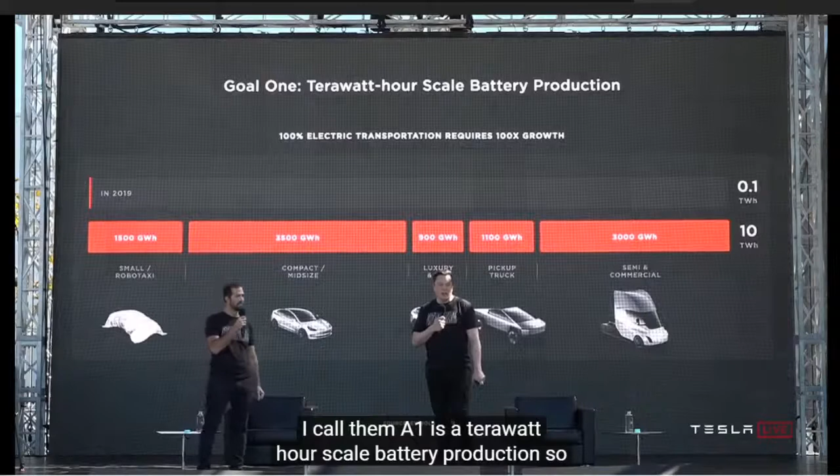So goal number one is terawatt-hour scale battery production. Tera is the new giga, and a terawatt is 1,000 times more than a gigawatt. So we used to talk in terms of gigawatts. In the future, we'll be talking in terms of terawatt hours. So this is what's needed in order to transition the world to sustainability.

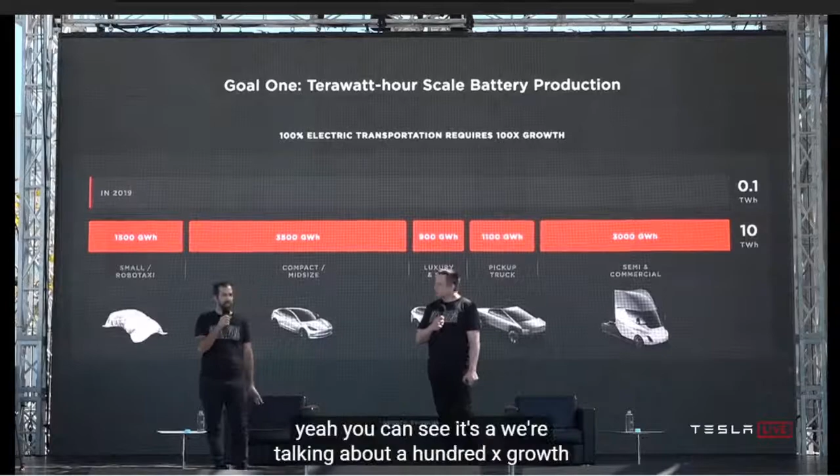Yeah, and you can see we're talking about 100x growth in batteries for electric vehicles to achieve this mission. And we are going to get there. It's just a matter of how fast, and our intention is to accelerate it.

Yeah, you basically need on the order of roughly 10 terawatt hours a year of battery production to transition the global fleet of vehicles to electric. And the average vehicle lasts 15 years, so we're talking about 150 terawatt hours, give or take, to transition all vehicles of all types to electric. Yeah, so it's a lot of batteries, basically.

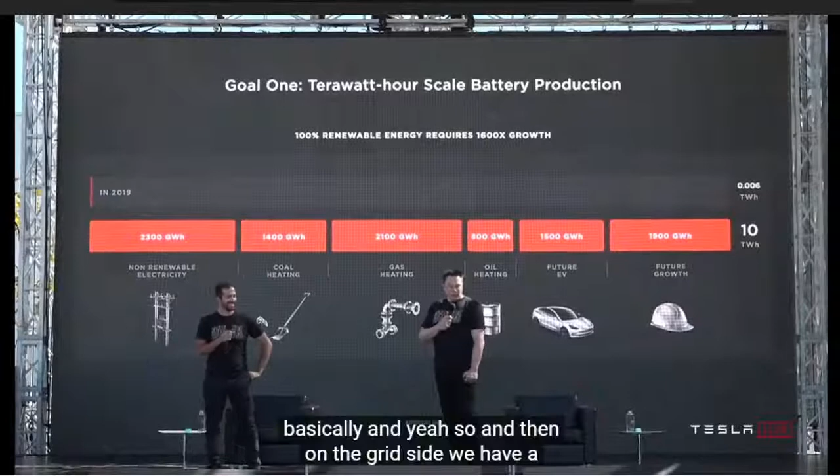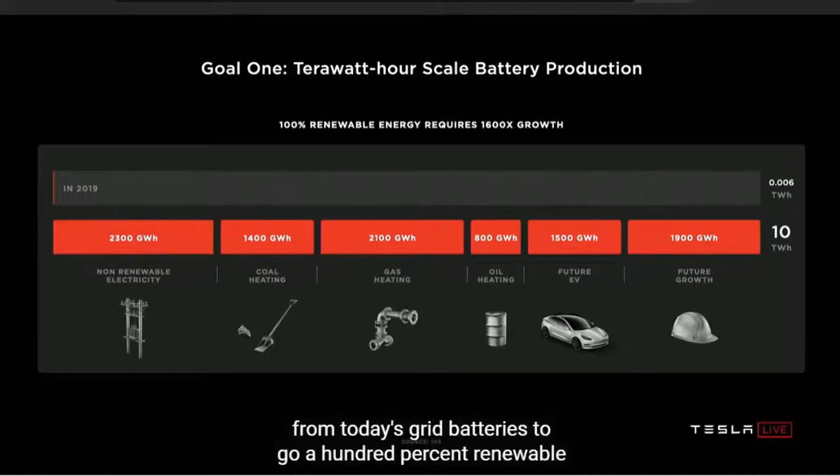And then on the grid side, we have a similar mountain to climb, 1,600 times growth from today's grid batteries to go 100% renewable on the grid and to take all of the existing heating fossil fuel uses in homes and businesses 100% electric.

Yeah, and this number, I think, might grow even more, as the world economy matures and as countries with high populations industrialize, we could see this number be even more. But let's say it's like roughly 20 to 25 terawatt hours per year, sustained for 15 to 25 years to transition the world to renewable. This is a lot. Yeah.

So today's batteries cannot scale fast enough. They're just too small. For Giga Nevada, 150 gigawatt hours per year is like what we probably expect to make out of there. But this is really pretty small in the grand scheme of things. That's only 0.15 terawatt hours.

And it costs too much. So we would need 135 fully built out Nevada gigafactories to achieve 20 terawatt hours a year. It's not a scalable enough solution. We need a dramatic rethink of the cell manufacturing system to scale as fast as we can and should.

Yeah, and I think we should view this as more than just a question of money. Money is sort of like an ethereal thing, but it's really the amount of effort. You have a certain amount of effort, in terms of people and machines, and depending on how efficient that effort is, for a given amount of effort, you want the most amount of batteries. So it's not just a question of like, well, if we had $2 trillion, tomorrow you could make this. It's not that easy. You actually need to organize a massive number of people, build a lot of machines, build the machines that make the machines. And so it's incredibly important to have that effort yield the most number of batteries.

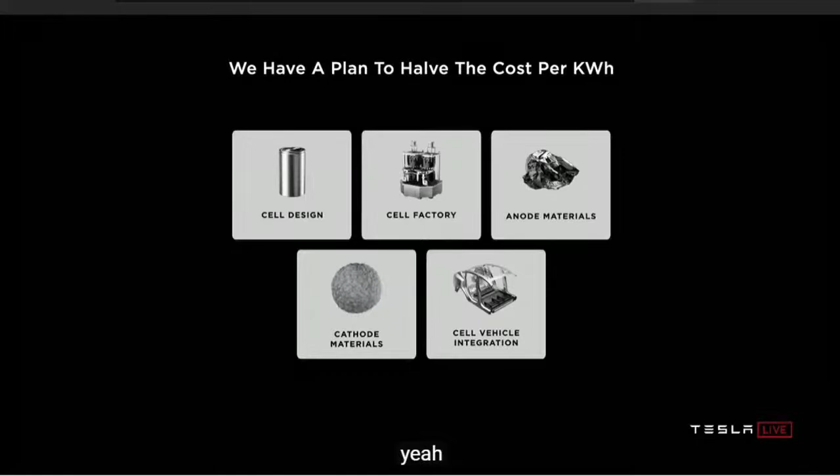And it's not a plan that rests on a single innovation, some research project that'll never see the light of day. It's a plan that has taken creative engineering and industrialization across every facet of what makes a cell into a battery pack, from raw material to the finished thing.

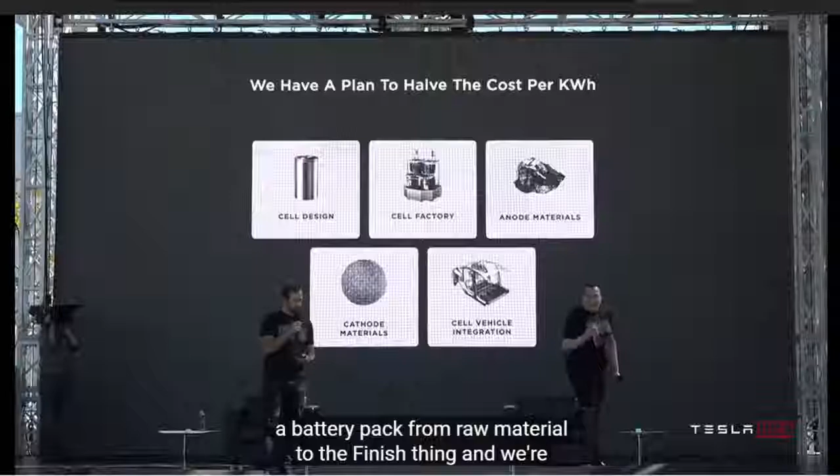We're going to go through that plan with you today, step by step, and build up how we get to these goals and how we accelerate this transition and make our vehicles and our grid batteries more affordable. We basically thought through every element of the battery, well, almost every element. There are a few more elements we won't get to today, but we will get to in the future.

So first, before we get too far into it, let's talk about what is in a battery cell. We've got the cap and the can, negative and positive terminals of the cell. When you open that cell, you've got a tab connected to those terminals, and what we call the jelly roll, which is the wound electrodes on the inside.

You can actually see what this looks like as you unwind it. This is over a meter long in a typical 2170 cell, so it's quite a long winding process. And you can see the tab still there.

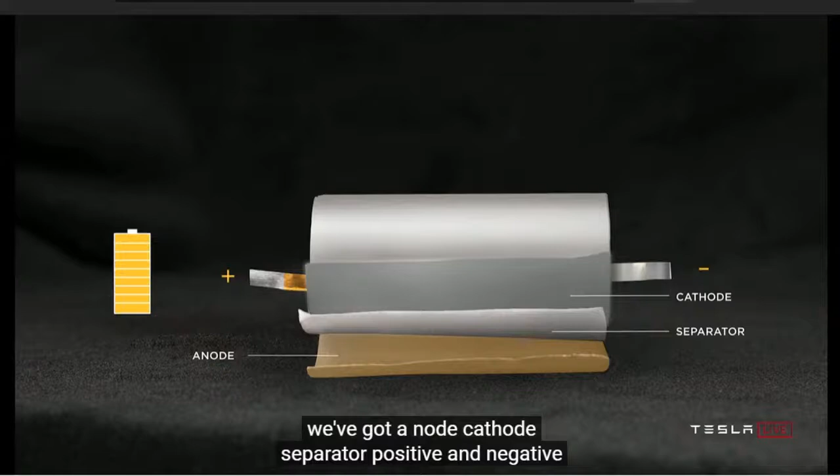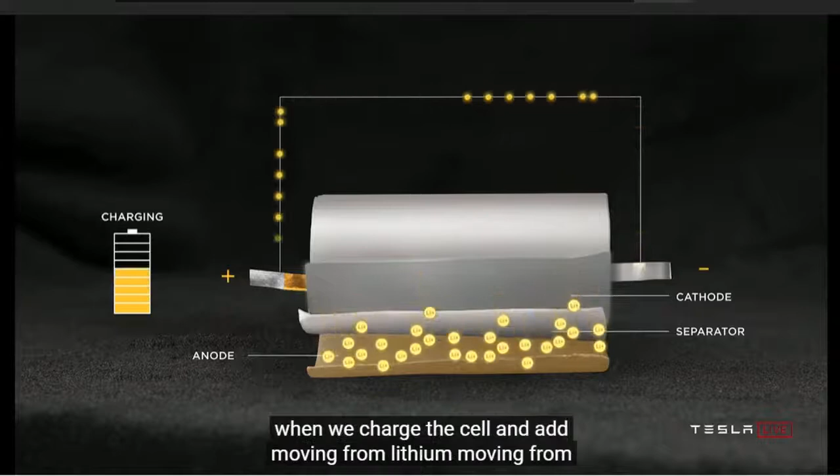To explain what's actually going on here, we've identified anode, cathode, separator, positive and negative terminal. Watch what happens as we discharge the cell: lithium moves from anode to cathode. Then the reverse — when we charge the cell, lithium moves from cathode to anode across the separator. This is the basic mechanism of all lithium-ion batteries, no matter what the form factor is.

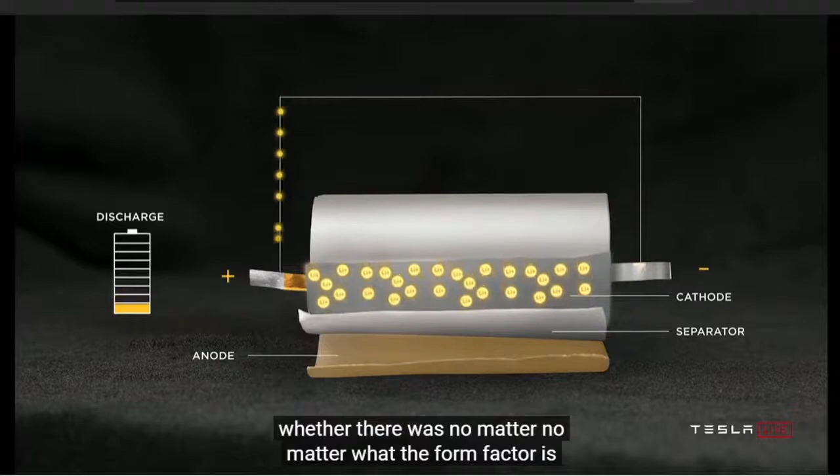When we look at what's happened to date, at least in our products, we've moved from the 18650 form factor to the 2170 form factor through great collaboration with our partners, Panasonic, new partners like LG and CATL, and probably others in the future.

A slight note on why it's called the 18650 — although not on the slide — versus the 2170: the first two digits refer to the diameter, and the second two digits refer to the length. That helps explain why these weird numbers. But nobody could explain to me why there was an extra zero, so I said, okay, well, we're deleting the zero that nobody can explain in future form factors. So technically it's the 18650, bizarrely, but going forward it's the 2170, because we just got rid of the extra zero since it's pointless.

And this was an evolutionary step, going from 18650 to 2170, bringing 50% more energy into the cell. But when we look to the ideal cell design, if we were to do it ourselves, we need to go beyond just what's in front of us and study the full spectrum of options. So as you can see, we swept the key figures of merit, how much we can reduce the cost and how much vehicle range increases as we change the outer diameter of the cell. We found a sweet spot somewhere around 46 millimeters.

But it's not just about a bigger form factor. Like anybody could make a bigger form factor. Any fool could make a bigger form factor. We're not any fool. Yeah, exactly.

Yeah, and I want to stress, this is not just a concept or a rendering. We're starting to ramp up manufacturing of these cells at our pilot 10 gigawatt hour production facility just around the corner. Yeah. So, yeah. It's a video of some of what's going on in the plant.

Now, I mean, to be clear, it will take about a year to reach the 10 gigawatt hour capacity. So this is important to appreciate. Like when you build a factory, there's a certain capacity that you design to, and then it takes some period of time to actually achieve that capacity.

So I would say it's probably about a year before we get to the 10 gigawatt hour annualized rate with the pilot plant. And this is just a pilot plant. The actual production plants will be more on the order of maybe 200 gigawatt hours, maybe more over time. And thank you.

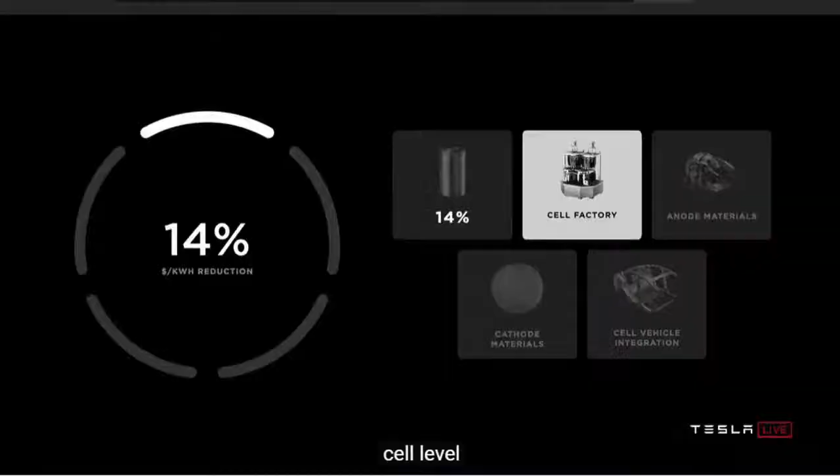But let's stack up everything we just saw at the cell level. So just the cell form factor change enables a 14% dollar per kilowatt hour reduction, just that cell form factor change. And now that you've been teased on this factory, we're going to go on and walk step by step through that factory and discuss a series of innovations there.

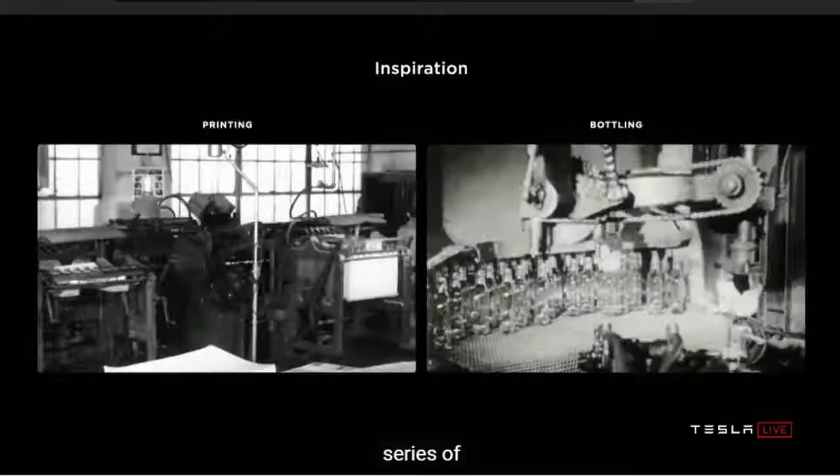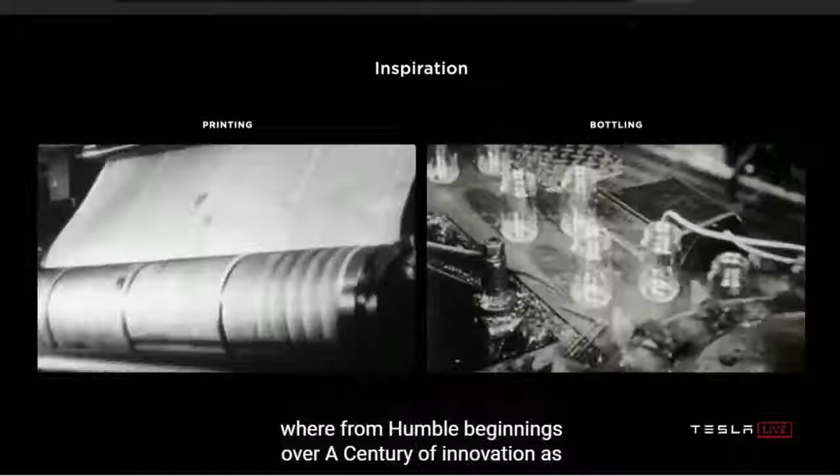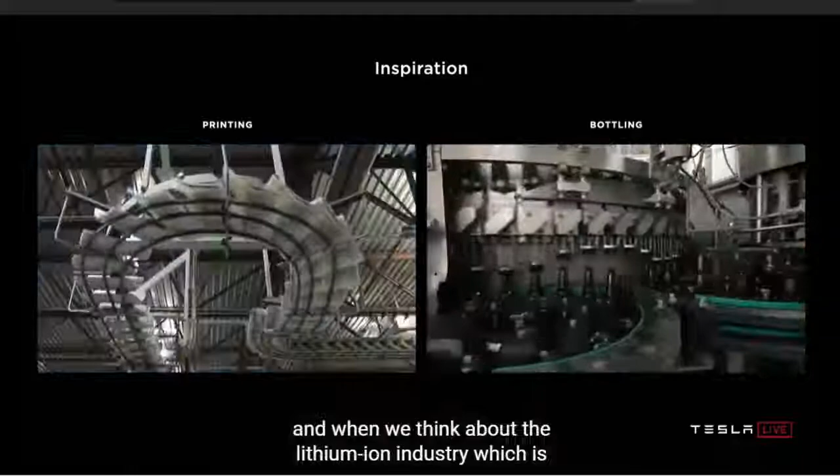When thinking about the ideal cell factory, we have inspirations behind us in the printing and bottling industry, where from humble beginnings, over a century of innovation has enabled mass scale, continuous motion, unbelievably low manufacturing cost. And when we think about the lithium-ion industry, which is really only in its third decade of high-volume production, it has so far to go to achieve similar scale and simplicity.

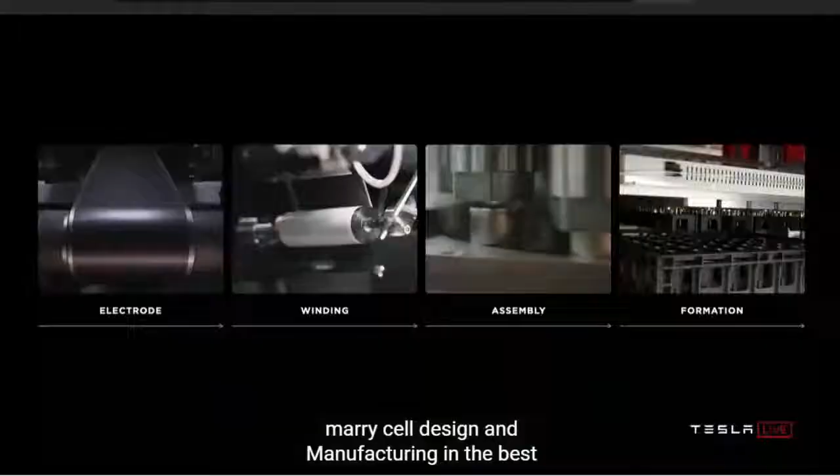And that was the inspiration that we set out to the team as we thought about how to marry cell design and manufacturing in the best possible factory. And let's talk a little bit about what's in a cell factory. First, there's an electrode process where the active materials are coated into films onto foils. Then those coated foils are wound in the winding process we just talked about, where if you do have tabs, you have to start and stop a lot.

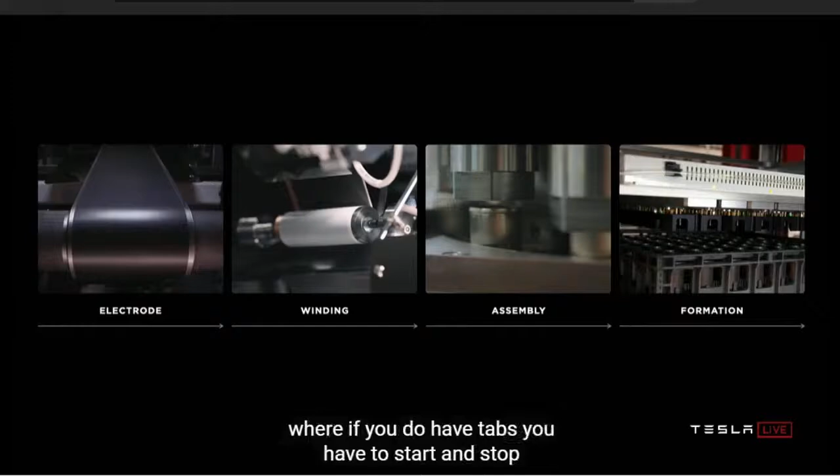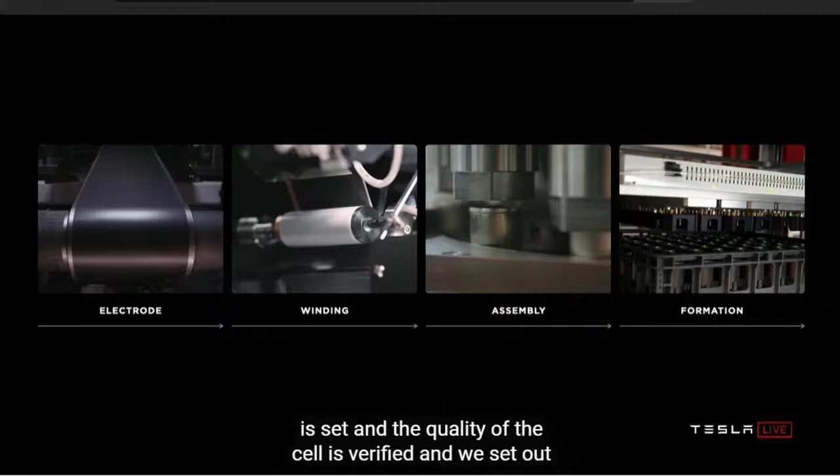Then the jelly roll is assembled into the can, sealed, filled with electrolyte, and then sent to formation, where the cell is charged for the first time, and where the electrochemistry is set and the quality of the cell is verified. And we set out at every step of this process to try to take that inspiration we just showed and think about how we make those processes fundamentally better and more scalable.

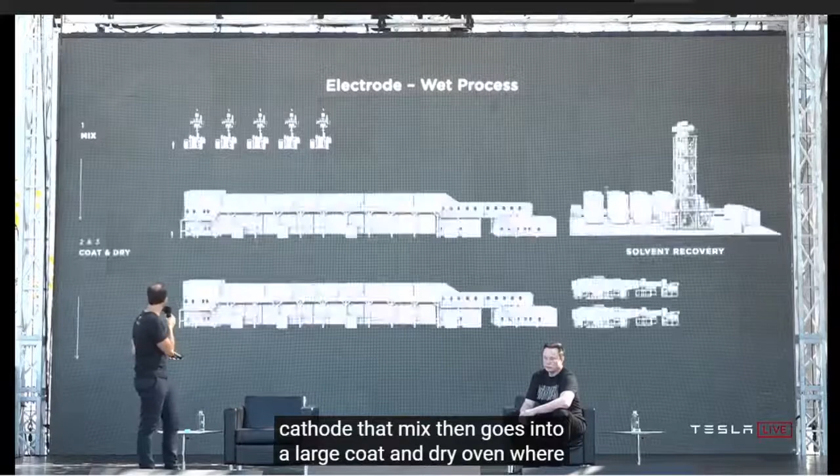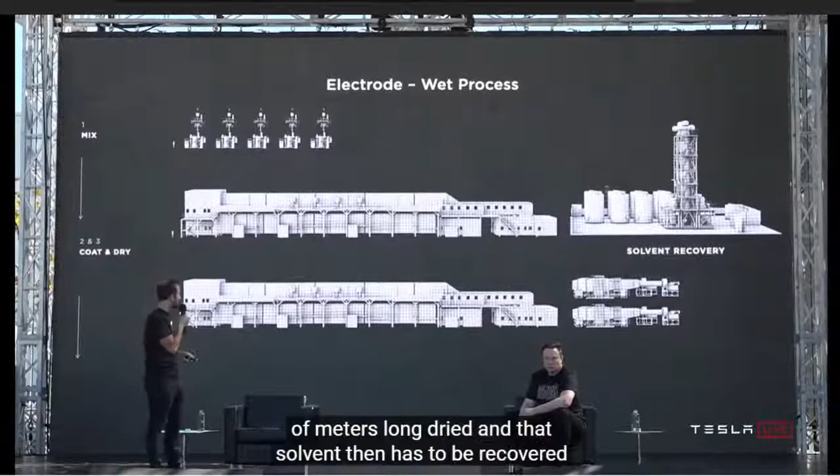And one of the most important processes is where it all begins, the wet process of the electrode coating. And just to give you all a sense of scale, I'm going to walk through what's in that wet process. You've got mixing, where the powders are mixed with either a water or a solvent for the cathode. That mix then goes into a large coat and dry oven where the slurry is coated onto the foil, huge ovens, tens of meters long, dried, and that solvent then has to be recovered. You can see the solvent recovery system.

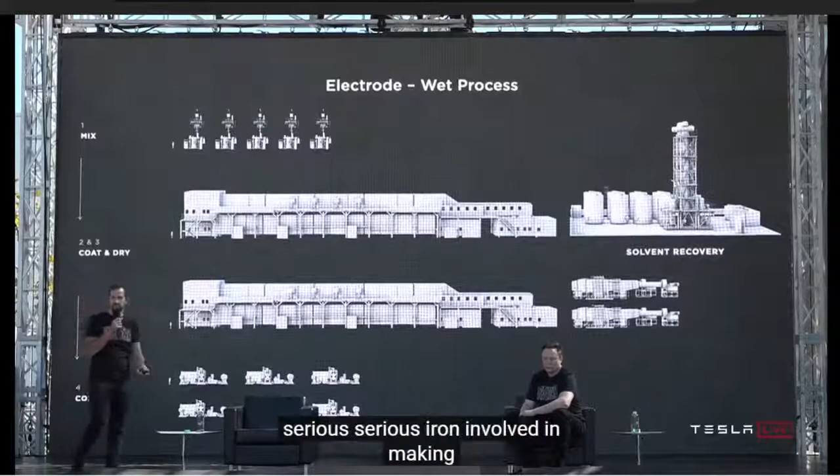And then finally, the coated foil is compressed to the final density. And when you're looking at this, you're like, wow, that's a lot of equipment for one step, especially when you consider that little speck next to the coating oven is a person. This is serious iron involved in making batteries.

Wouldn't it be great if we could skip that solvent step, which is one of those dig a ditch and then fill it kind of things where you put the solvent in and then take it out and recycle it, and just go straight to dry mix to coat? And that's what the dry process really is about. And in the most basic form, you can see it here on a bench top. Literally, powder into film.

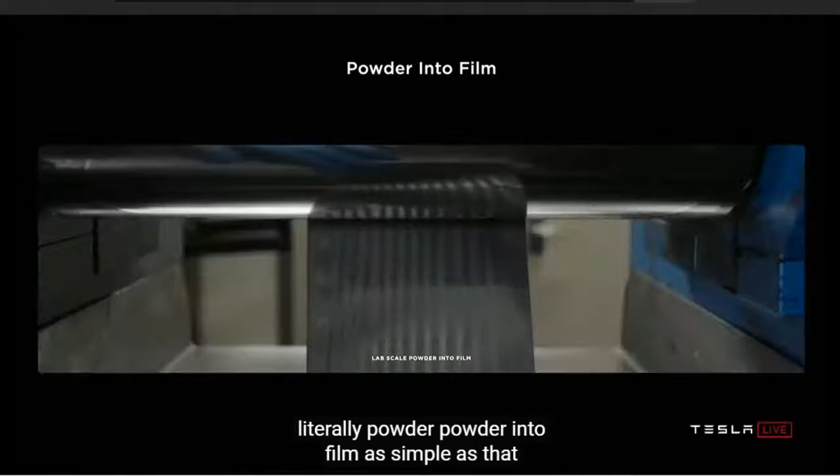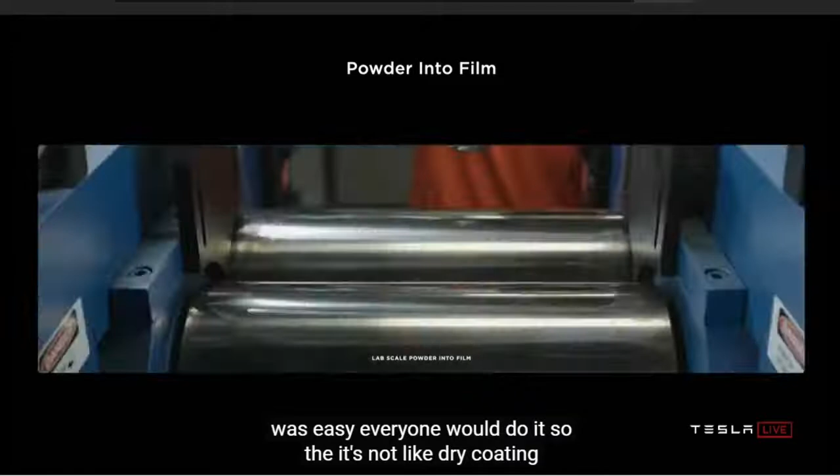As simple as that. I mean, it's hard, actually, just to be clear. So, if this was easy, everyone would do it. So it's not like dry coating electrode is actually easy. It's actually very hard to do what appears to be a simple thing.

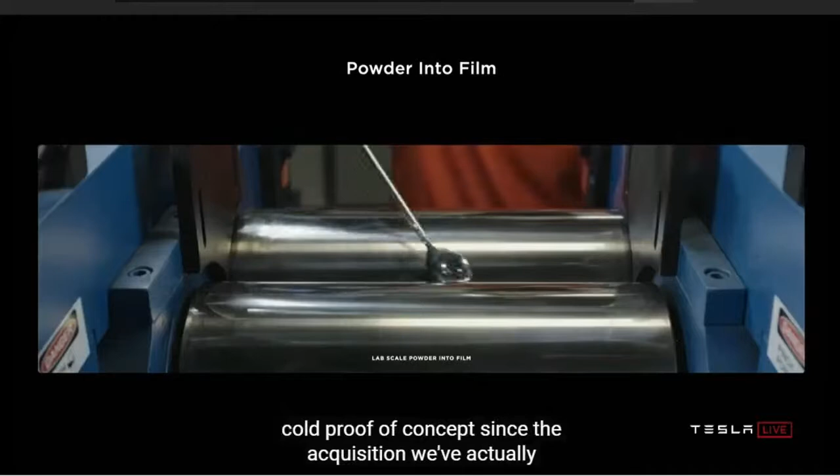And it's worth noting, we did acquire Maxwell a little over a year ago, I guess. And it's certainly a good company and everything, but the dry coating they had was sort of what I would call proof of concept. Since the acquisition, we've actually revved the machine that does the dry coating 4 times.

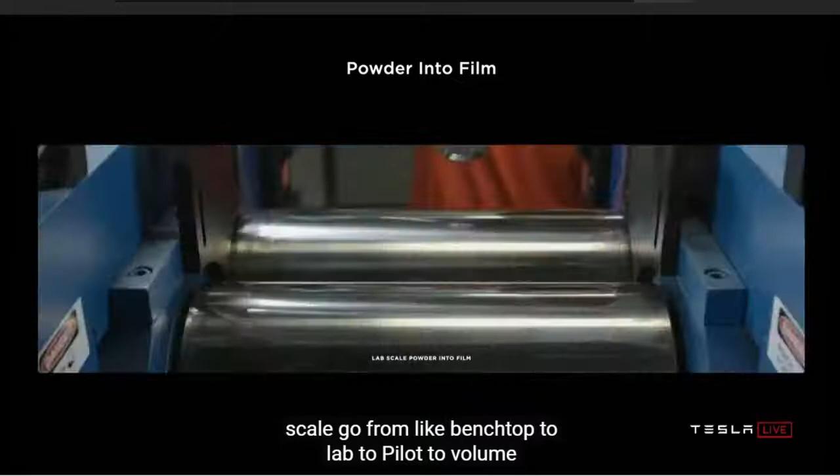So we're in revision 4 post acquisition of the machine, and there's still a lot of work to do. So I would not say this is completely in the bag. It's still a lot of work to do, and as you go from benchtop to lab to pilot to volume production, there are actually major issues that you encounter at every level. It's not like you make something work on your bench and bingo, now you can make a bazillion of it. Absolutely. It's insanely difficult to scale up.

But if you do scale it up, what you saw before becomes this. Yeah. So you can see the motivation. A 10 times reduction in footprint, a 10 times reduction in energy, and a massive reduction in investment. But as Elon was saying, simple is hard. Yeah.

Yeah, to be clear, I would like to not say that right now it's just totally working. It's close to working, even now at the pilot plant level. Well, it's fair to say it does work, but with not a high yield. Yeah, so we're still ironing out the kinks, but we've made tens of thousands of cells, thousands of kilometers of electrode. We are on the 4th generation of the equipment, so we've learned a lot along the way.

Yeah. It is super demanding because every atom has its place if you want to deliver the energy density and the cycle life and the supercharging. But we're confident that we will get there, but it will be a lot of work along the way. There's a clear path to success, but a ton of work between here and there. Yep. But this is a really profound improvement. Again, for people that know battery manufacturing, this is gigantic.

We'll probably be on machine revision 6 or 7 by the time we do large-scale production. The rate at which the machines are being improved is extremely rapid. Literally every 3 or 4 months is a new rev. Yeah, and beyond the electrode, we continue to innovate on every other process step. So let's talk a little bit about assembly, which is next.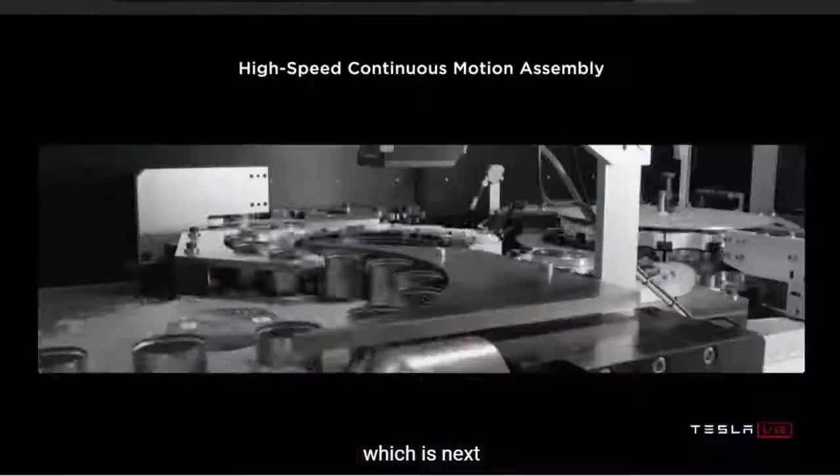The key to a high-performing assembly line is accomplishing processes while in motion, continuous motion, and thinking of the line as a highway, max velocity down the highway, no start and stop, no city driving. Exactly, no stoplights and traffic lights or anything. You want the highway. I want the highway.

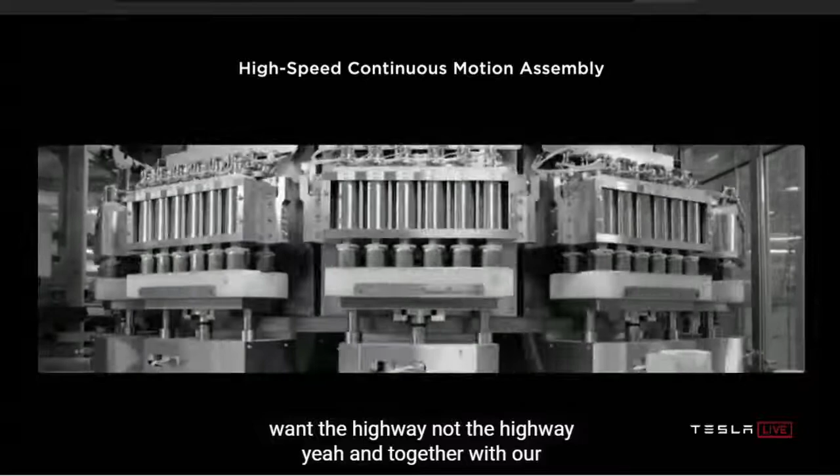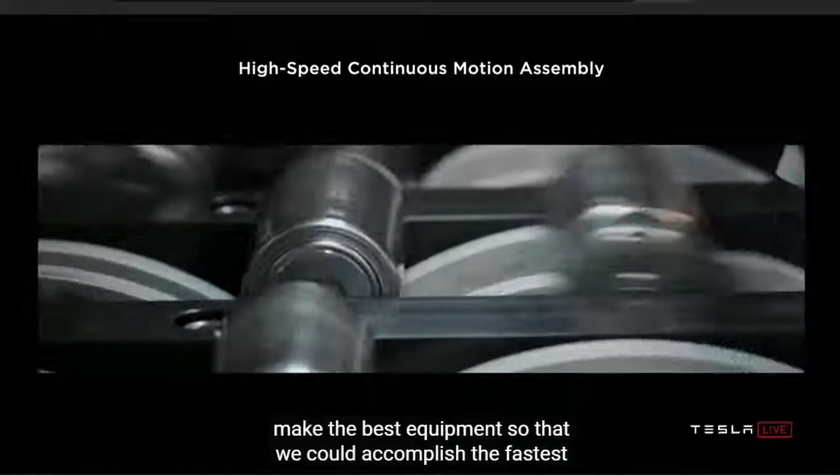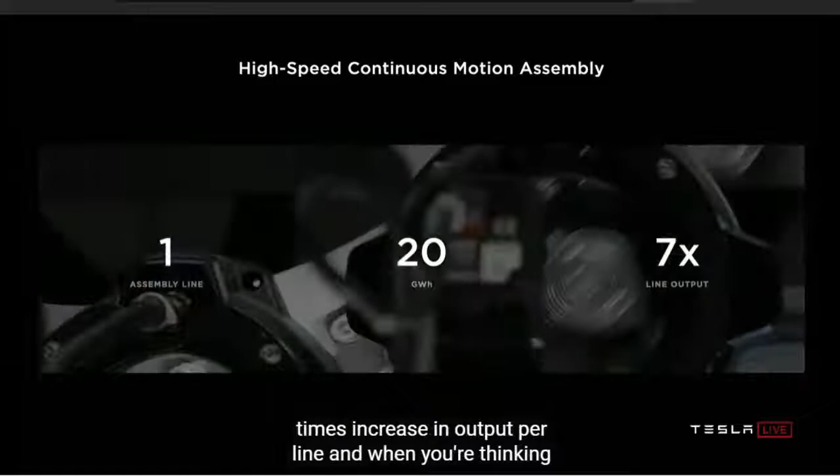Yeah. And together with our internal design team that designs this equipment, we coupled thinking about how to make the best cell with thinking about how to make the best equipment so that we could accomplish the fastest parts per minute rates on all of these tools. And through all of that development, we were able to implement assembly lines: one line, 20 gigawatt hours, 7 times increase in output per line. And when you're thinking about scalability and pure effort, having one line be 7x the capability is just effort multiplying. Yeah.

You can sort of think about the fundamental physics of a factory. I think it's actually quite a lot like the rocket equation, where you've got your exhaust velocity and then the log of the start to end masses. So it's basically saying, how fast are things going and what percentage of the factory volume is doing useful work. And conveyance does not count as useful work. So only the value-added steps.

If you break the factory down into cubic meter sections, or smaller, like 1 liter sections, and say, is a majority of this volume doing useful work? You would be astounded at how bad most factories are. They're maybe 2 or 3%, including our factory in Fremont. So I think it is possible to get to at least 10 times that volumetric efficiency. So more like 30%, maybe more, and be 10x better, which means the factory can be 10 times smaller. And then the other thing is how fast things are going through the factory. It's like speed and density.

The faster you go, a factory moving at twice the speed of another factory is equivalent to two factories. The company that will be successful is the one that with one factory can accomplish what other companies take 2, 3, or 4 factories to do.

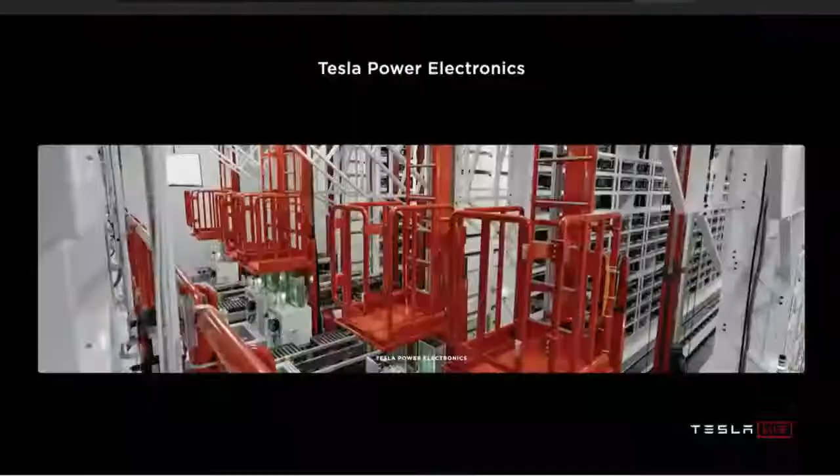Okay, now let's talk about formation. In a typical cell factory, formation represents 25% of the investment. What is formation? It's charging and discharging cells and verifying the quality of the cell. Turns out we've charged and discharged billions and billions of cells in our vehicles, so we know a thing or two about that. The typical formation setup is you charge and discharge each cell individually.

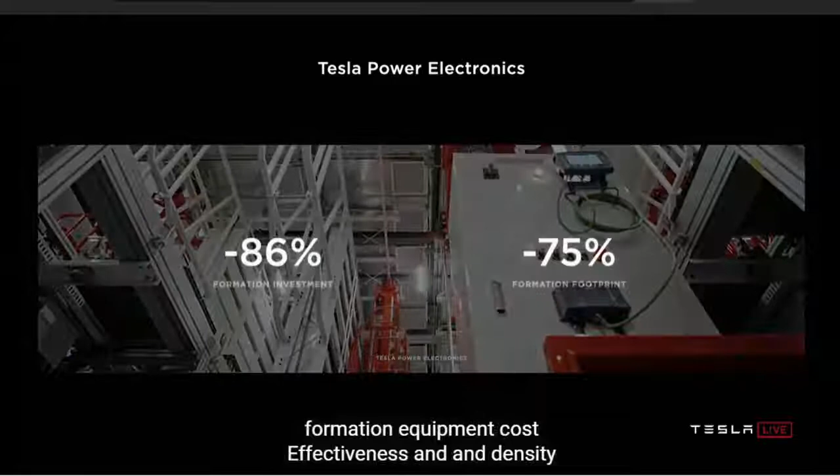In our car, we charge thousands of cells at once. And we took our principle and our power electronics, leveraging Powerwall, vehicle battery management systems, and others, to dramatically improve the formation equipment cost effectiveness and density. This results in an 86% reduction in formation investment, and a 75% reduction in footprint.

So essentially what this translates to, based on what we know today, is about a 75% reduction in the investment per kilowatt hour or gigawatt hour. It's basically 4 times better than the current state of the art, to the best of our knowledge. And I think there's probably room to improve even beyond that. Definitely, yeah.

We're able to, from a volume standpoint, get in a smaller form factor than Giga Nevada many times the cell output. So you can see we can get a terawatt hour in less space than it took to make a gigawatt hour, 150 gigawatt hours. So this is pretty profound. I would not have thought this was possible several years ago, that we could get to terawatt hour scale in less space than what we currently envision for doing 150 gigawatt hours.

Yes, simpler accelerates terawatt hour scale, and that's what we need to do to accelerate our mission. And as Elon said, we're going to try to even improve on this as we push towards our goals.

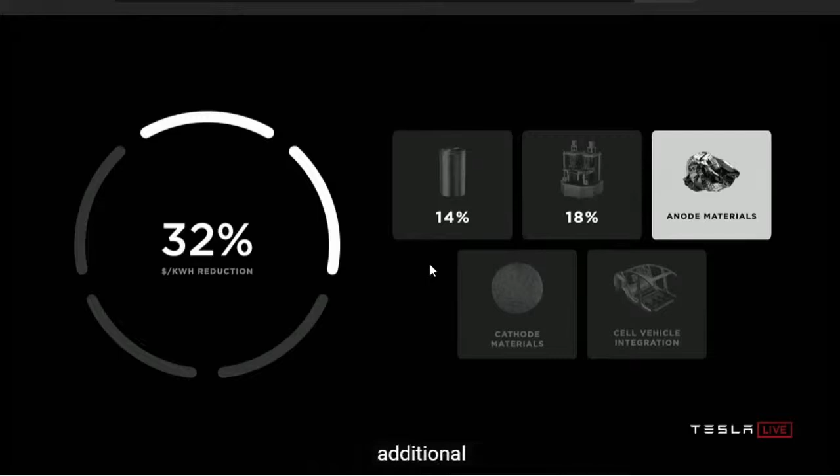Not only is all of that manufacturing innovation fantastic for enabling scale, it's also an additional 18% reduction in dollar per kilowatt hour at the battery pack level. But wait, there's more. But wait, there's more.

So we have a manufacturing system. We've got a cell design. What are the active materials we're going to put in that cell design? Let's talk about the anode first. Let's talk about silicon. Why is silicon awesome?

It's awesome because it's the most abundant element in the Earth's crust after oxygen, which means it's everywhere. It's sand. Sand is silicon dioxide. And it happens to store 9 times more lithium than graphite, which is the typical anode material in lithium-ion batteries today. So why isn't everybody using it? The main reason is because the challenge with silicon is that it expands 4x when fully charged with lithium.

All of that expansion stress on the particles causes cracking, they start electrically isolating, you lose capacity, and the energy retention of the battery starts to fade. It also gums up with a passivation layer that has to keep reforming as the particles expand. Basically, with silicon, the cookie crumbles and gets gooey.

Current approaches to solve this, which exist today, are the silicon in the cars you're all in right now. They involve highly engineered, expensive materials in the scheme of things. They're still great and enable some of the benefits of silicon, but they don't enable all of it, and they're not scalable enough. You can see some things you may have heard of: SiO, silicon with carbon, or silicon nanowires. That's kind of the space right now.

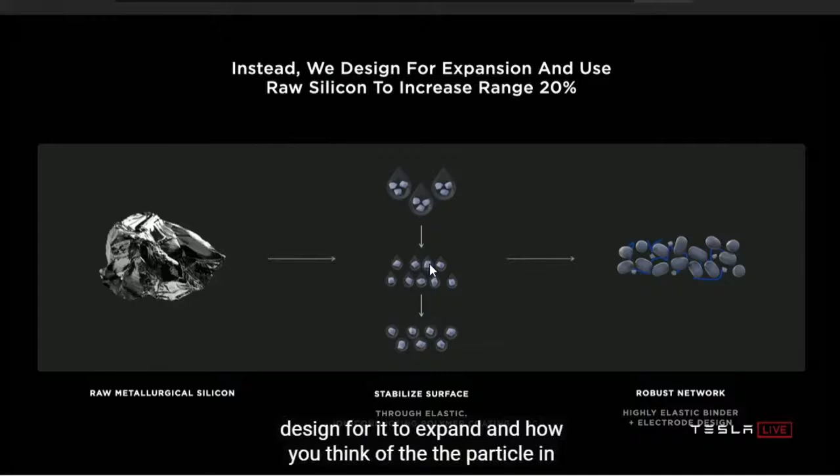What we're proposing is a step change in capability and a step change in cost. That really means going to the raw metallurgical silicon itself. Don't engineer the base metal. Just start with that and design for it to expand and how you think of the particle in the electrode design and how you coat it.

Basically, $1 per kilowatt hour. If you use simple silicon, it's dramatically less than even the silicon currently used in batteries made today, and you can use a lot more of it. The anode would cost, with this silicon, $1.20 a kilowatt hour.

So how does it work? Start with raw metallurgical silicon, stabilize the surface with an elastic ion-conducting polymer coating applied through a very scalable approach—no chemical vapor deposition, no highly engineered high capex solutions—and then integrate it into the electrode through a robust network formed out of a highly elastic binder.

In the end, by leveraging this silicon to its potential, we can increase the range of our vehicles by an additional 20%, just from this improvement. It gets cheaper and longer range. When we take that anode cost reduction, we're looking at another 5% dollar-per-kilowatt-hour reduction at the battery pack level. And there's more.

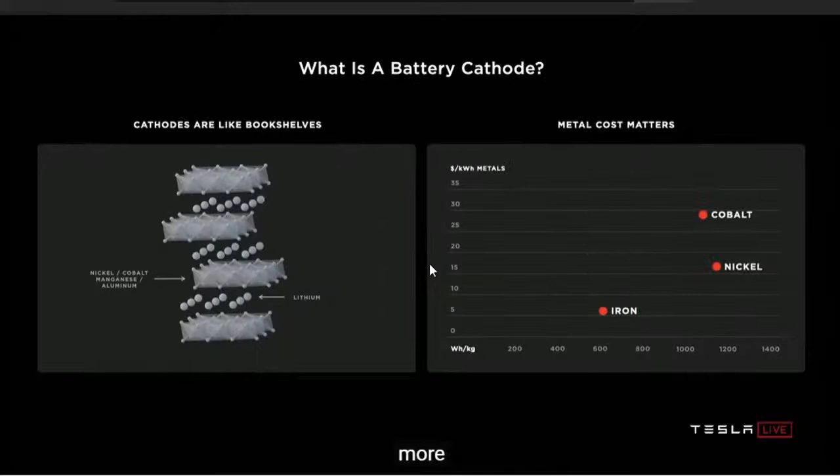Let's talk about cathodes. What is a battery cathode? Cathodes are like bookshelves, where the metal—the nickel, the cobalt, the manganese, or aluminum—is like the shelf, and the lithium is the book. What really sets apart these different metals is how many books of lithium they can fit on the shelves and how sturdy the shelves are.

It's tough to figure out exactly the right analogy to explain cathode and anode, but a bookshelf is probably a pretty good one, in the sense that you need a stable structure to contain the ions. You want a structure that doesn't crumble or get gooey—that holds its shape in both the cathode and the anode. As you're moving these ions back and forth, it needs to retain its structure. If it doesn't, you lose cycle life and your battery capacity drops very quickly.

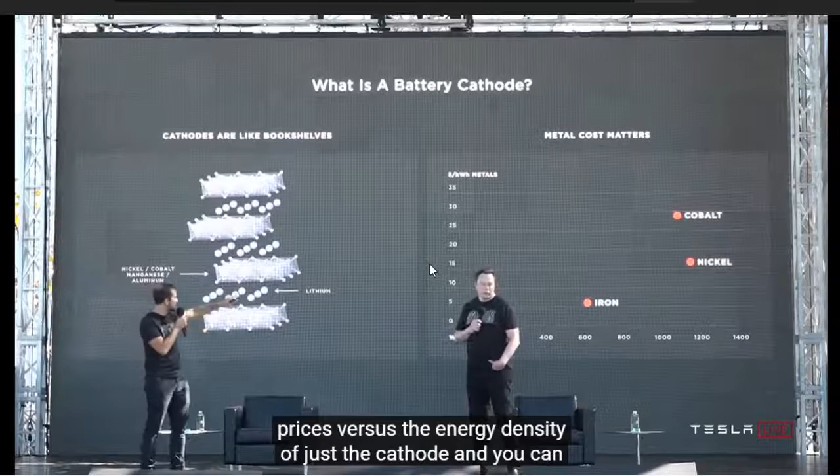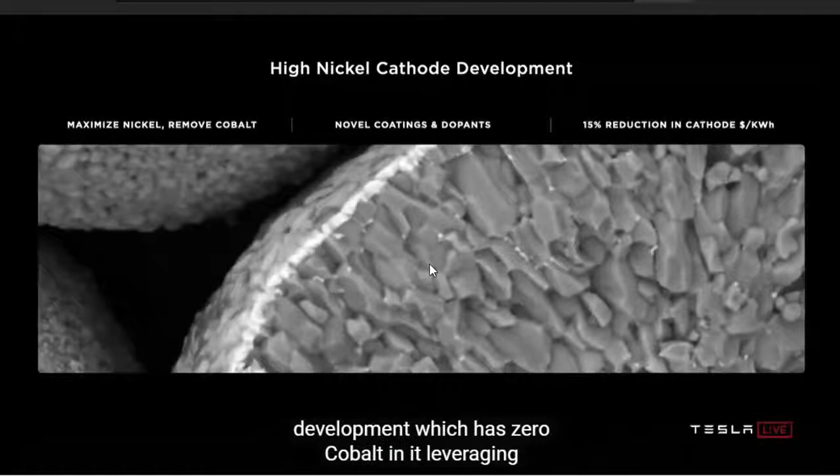One of the reasons cobalt is even used at all is because it's a very stable bookshelf. The challenge with going to pure nickel is stabilizing that bookshelf with only nickel. That's what we've been working on with our high-nickel cathode development, which has zero cobalt in it. Leveraging novel coatings and dopants, we can get a 15% reduction in cathode dollar per kilowatt hour. It's a big deal.

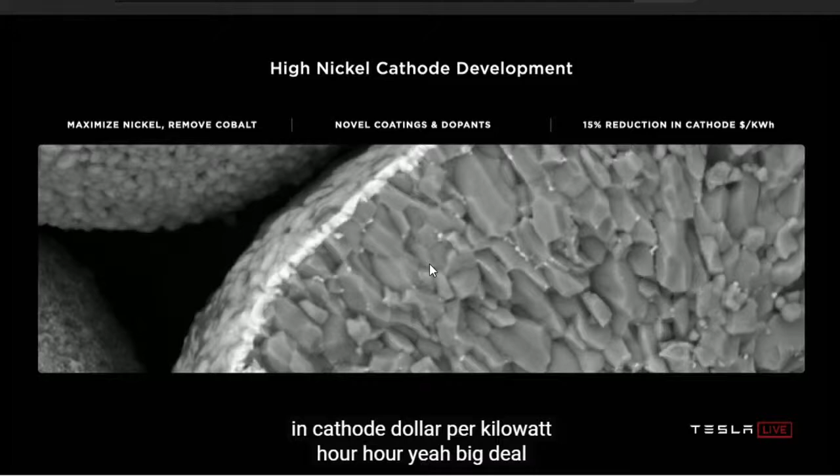But it's not just about nickel. You want to? Yeah, sure.

So in order to scale, we really need to make sure that we're not constrained by total nickel availability. I actually spoke with the CEOs of the biggest mining companies in the world and said, please make more nickel. It's very important. And so I think they are going to make more nickel.

But there's also, I think we need to have a kind of a 3-tiered approach to batteries. Starting with iron, that's kind of like a medium range, and then nickel manganese as sort of a medium plus, intermediate, and then a high nickel for long range applications like Cybertruck and the semi. Because something like a semi truck, it's extremely important to have high energy density in order to get long range.

So, just to give iron a bit more time - although if you look at the watt-hours per kilogram at the cathode level, iron looks like nickel's twice as good. But when you fully consider it at the pack level, everything else taken into account, nickel is maybe 50 or 60% better than iron. So iron is a little better than it would seem when you look at it at the pack level fully considered. It's not as good as nickel - nickel is like 50 to 60% better, but iron is actually pretty good. Good for stationary storage and for medium range applications where energy density is not paramount.

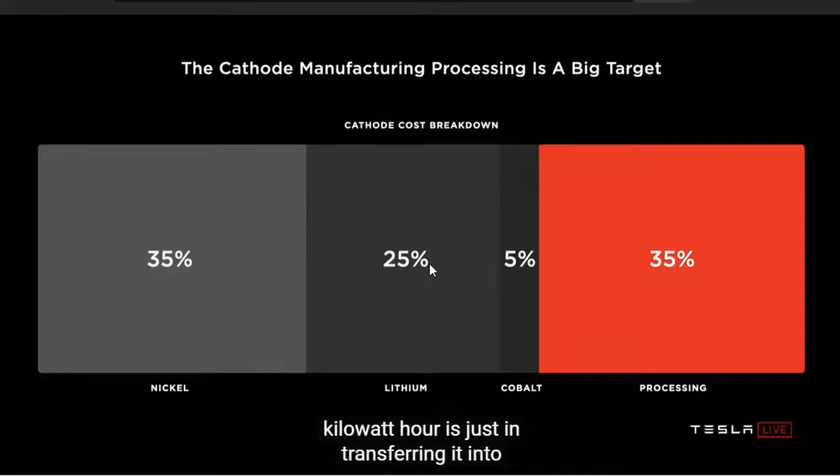And, beyond the metals, because a lot of people spend time talking about the metals, actually the cathode process itself is a big target. 35% of the cathode dollar per kilowatt hour is just in transferring it into its final form. And so we see that as a big target, and we decided to take that on.

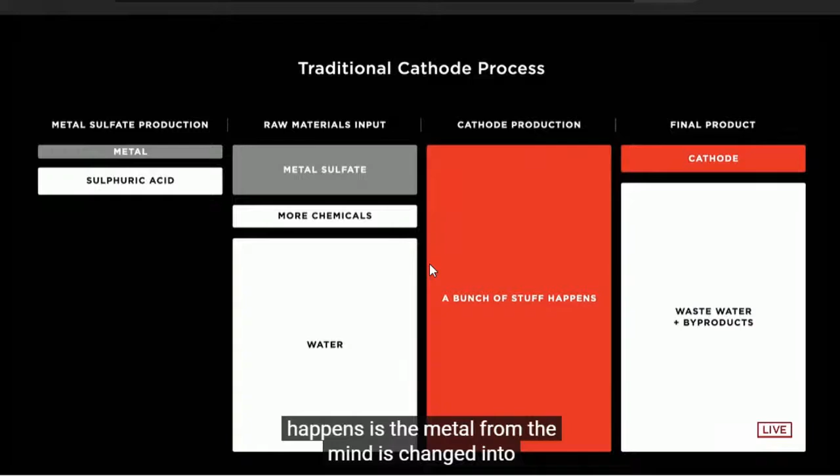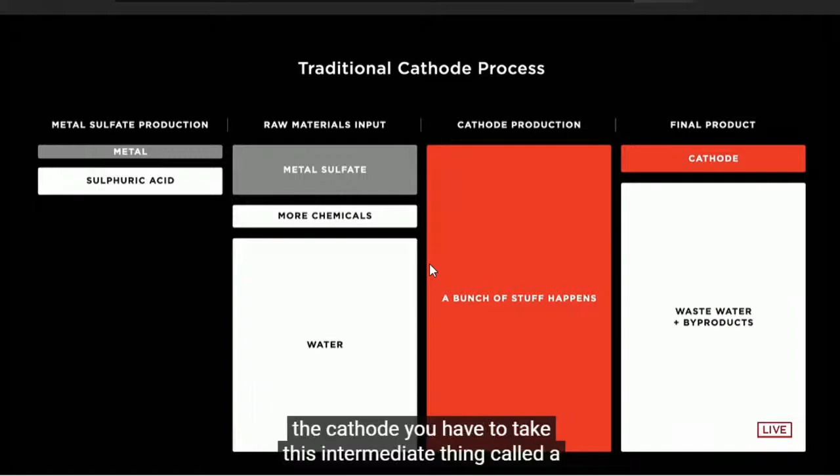Here's a view of the traditional cathode process. Effectively, if you start at the left and you have the metal from the mine, the first thing that happens is the metal is changed into an intermediate thing called a metal sulfate, because that's just what chemists wanted a long time ago. And then when you're making the cathode, you have to take this metal sulfate, add chemicals, add a whole bunch of water, a whole bunch of stuff happens in the middle, and at the end, you get that little bit of cathode and a whole bunch of wastewater and byproducts.

Yeah, it's insanely complicated. If you look at the total journey - like it's a small world journey of 'I am a nickel atom, what happens to me?' - it's crazy. You're going around the world 3 times. There's like the moral equivalent of digging a ditch, filling in the ditch, and digging the ditch again. It's total madness, basically. These things just grew up as legacy processes - it's how it was done before. And they connected the dots but really didn't think of the whole thing from a first principles standpoint, saying how do we get from the nickel ore in the ground to the finished nickel product for a battery. So we've looked at the entire value chain and said, how can we make this as simple as possible? And that's what we're proposing here with our process.

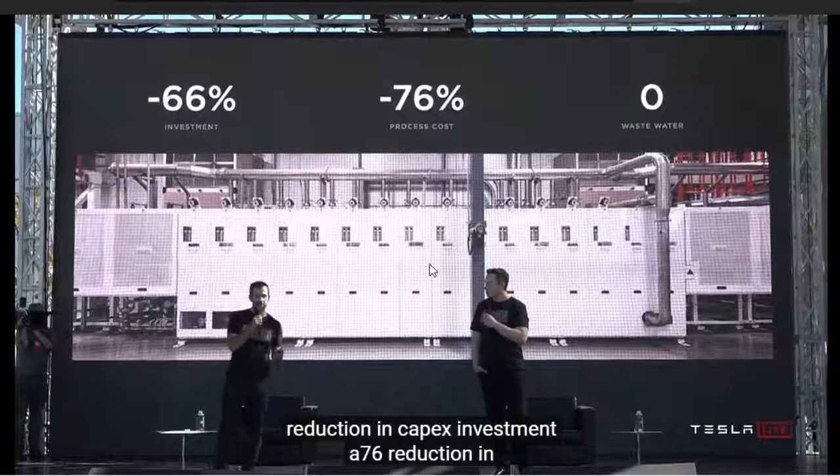As you can see, a whole lot less is going on here. We get rid of the intermediate - metal, water, final product cathode - and recirculate the water, no wastewater at all. And when you summarize all of that, it's a 66% reduction in CapEx investment, a 76% reduction in process cost, and zero wastewater. Much more scalable solution.

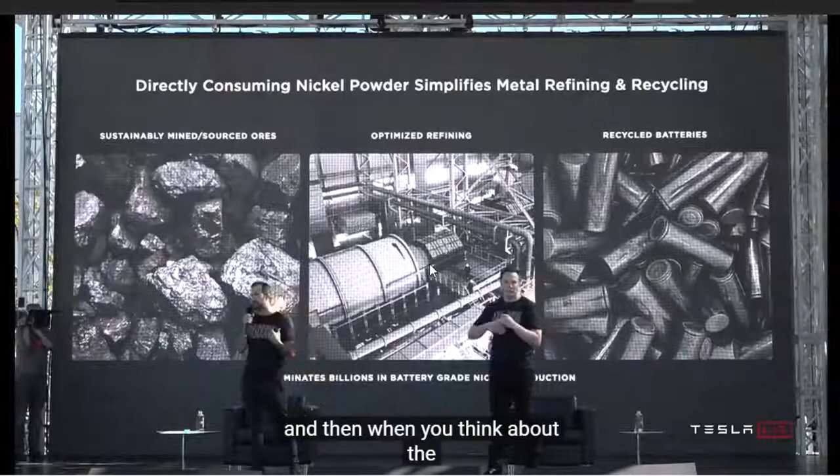And then when you think about the fact that now we're actually just directly consuming the raw metal nickel powder, it dramatically simplifies the metal refining part of the whole process. So we can eliminate billions in battery-grade nickel intermediate production - it's not needed at all. And we can also use that same process to directly consume the metal powder coming out of recycled electric vehicle and grid storage batteries. So this process enables both simpler mining and simpler recycling.

And now that we have this process, obviously we're going to go and start building our own cathode facility in North America, leveraging all of the North American resources that exist for nickel and lithium. Just by localizing our cathode supply chain and production, we can reduce miles traveled by all the materials that end up in the cathode by 80%, which is huge for cost.

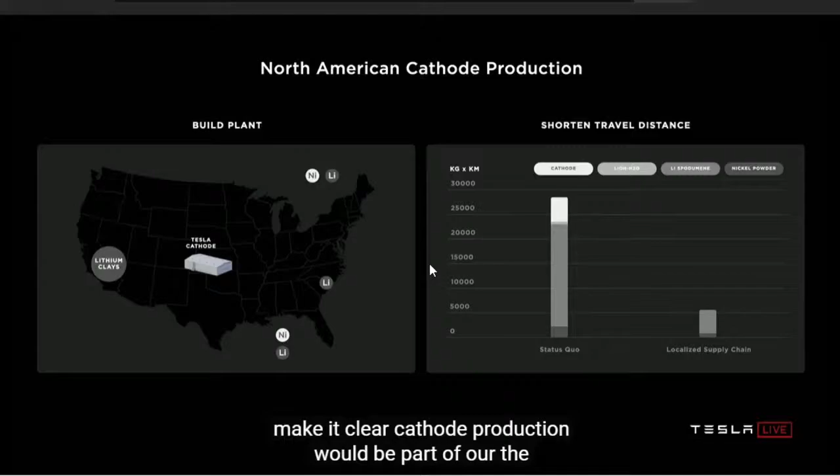To be clear, cathode production would be part of the Tesla cell production plant. So basically raw materials would come from the mine, and out comes a battery. On that note, the way the lithium ends up in the cell is through the cathode.

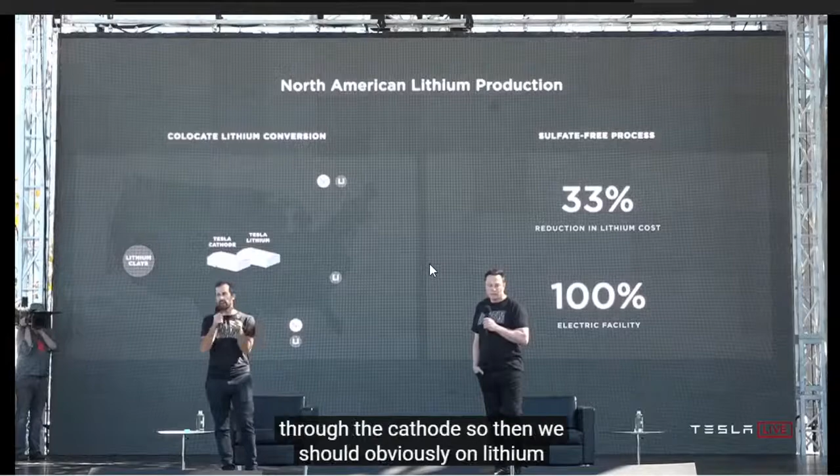So then we should obviously do on-site lithium conversion as well, which is what we will do using a new process that we're going to pioneer. That's a sulfate-free process, again skipping the intermediate. It gives a 33% reduction in lithium cost, and it's a 100% electric facility co-located with the cathode plant.

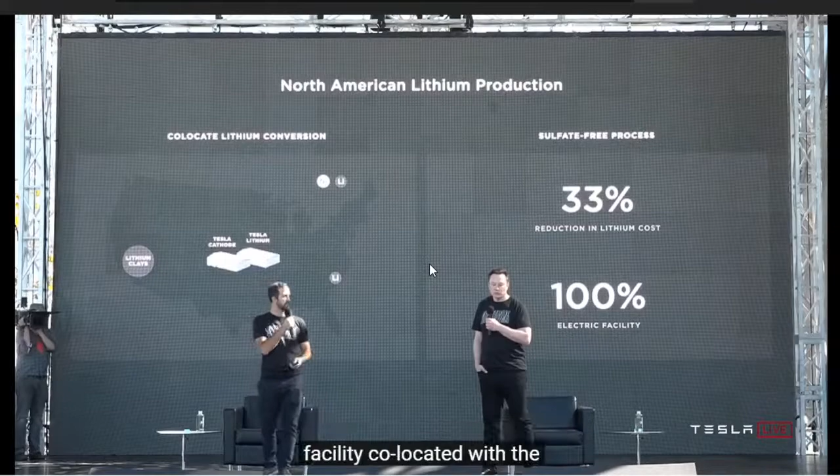It's important to note that there is a massive amount of lithium on Earth. Lithium is not like oil—there's a massive amount of it pretty much everywhere. In fact, there's enough lithium in the United States to convert the entire United States fleet to electric. All the cars in the United States, like 300 million or something—every vehicle can be converted to electric using only lithium that is already discovered and known to exist in the United States.

People really haven't even been looking, because it's just so widely available. But it is important to ask: what is the smartest way to take the ore and extract the lithium, and do so in an environmentally friendly way? Looking at it from a first principles physics standpoint, instead of just doing it the way it's always been done, we found that we can actually use table salt, sodium chloride, to basically extract the lithium from the ore.

Nobody's done this before, to the best of my knowledge. And all the elements involved are reusable—it's a very sustainable way of obtaining lithium.

We actually got rights to a lithium clay deposit in Nevada, over 10,000 acres. The nature of the mining is also very environmentally sensitive—we take a chunk of dirt out of the ground, remove the lithium, and then put the chunk of dirt back where it was. So it will look pretty much the same as before, and won't look terrible. It'll be nice.

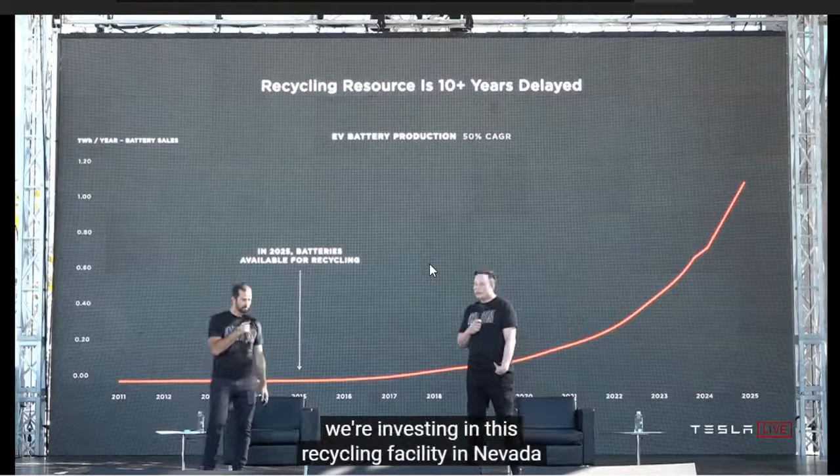Just to think about what this actually means, the recycling resource is always 10 or more years delayed because batteries last a really long time. But eventually, this is the way that all resources will be made available, and that's why we're investing in this recycling facility in Nevada. Long-term, new batteries will come from old batteries once the fleet reaches steady state.

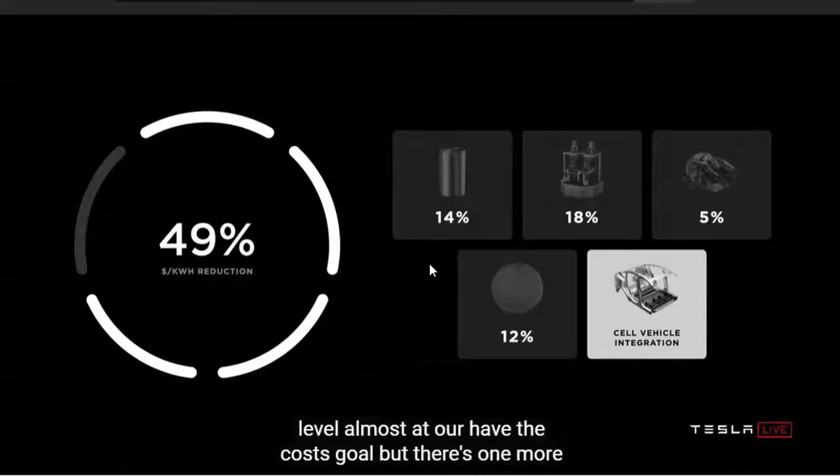Okay, so we just talked about scaling cathode and recycling. All of the benefits you just saw are added to this benefit of a 12% reduction in dollars per kilowatt hour at the battery pack level. Almost at our halve-the-cost goal, but there's one more section. Take it away, Elon.

So there's an architecture that we've been wanting to do at Tesla for a long time, and we finally figured it out. I think it's the way that all electric cars in the future will ultimately be made. It's the right way to do things.

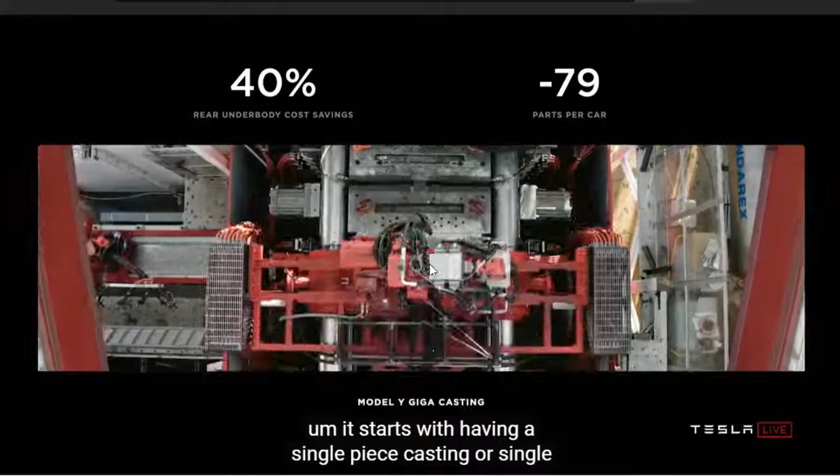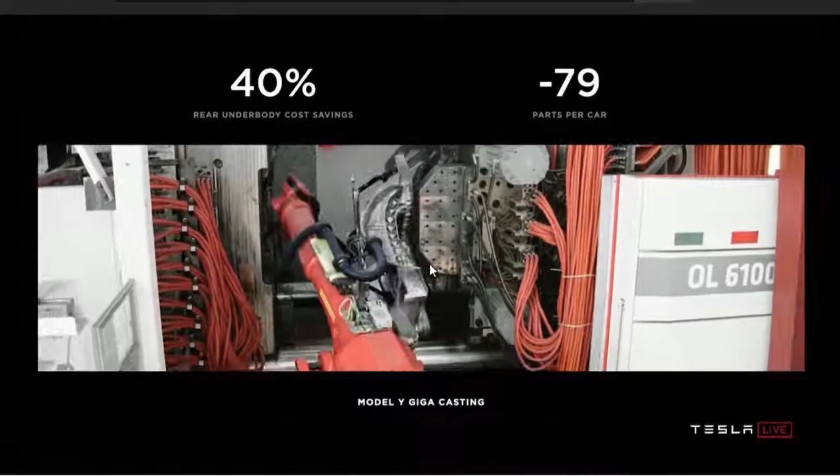So it starts with having a single piece casting for the front body and the rear body. And in order to do this, we commissioned the largest casting machine that has ever been made, and it's currently working just over the road at our Fremont plant.

We have it, it's pretty sweet, currently making the entire rear section of the car as a single piece, high pressure die cast aluminum. In order to do this, we had to develop our own alloy, because we wanted a high strength casting alloy that did not require coatings or heat treatment. This is a big deal, especially with a large casting, because if you heat treat it afterwards, it tends to deform. It kind of does this potato chip thing, so it's very hard to keep a large casting to have its shape. There was no alloy that existed that could do this, so we developed our own alloy, a special alloy of aluminum that has high strength without heat treat and is very castable. That's a great achievement of our materials team.

In fact, in general, we've got a lot of advanced materials coming for Tesla, new alloys and materials that have never existed before. So you're basically making the front and rear of the car as a single piece, and that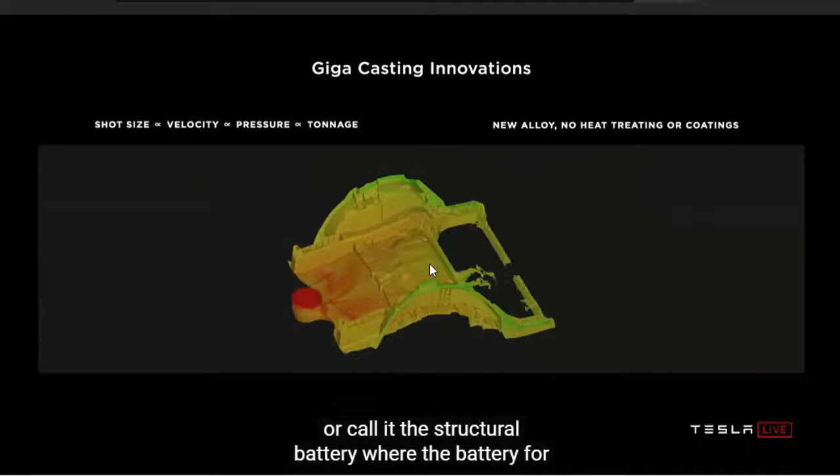interfaces to what we call the structural battery, where the battery for the first time will have dual use. The battery will both have the use as an energy device and as structure. This is absolutely the way things are done.

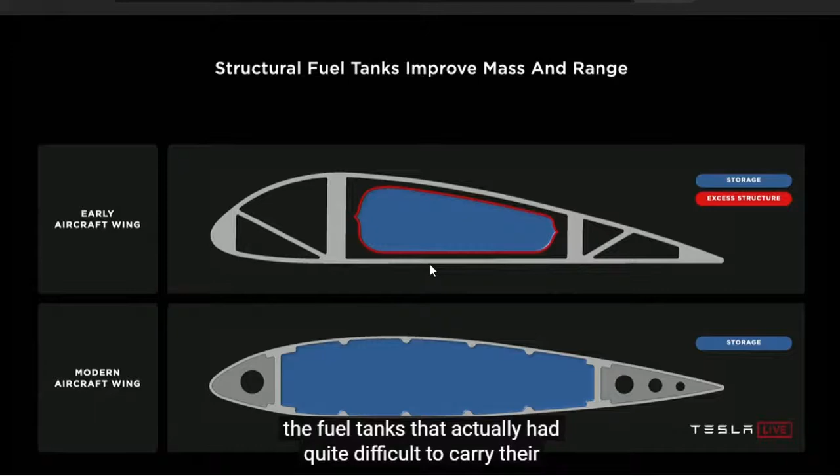In the early days of aircraft, they would carry the fuel tanks as cargo. The fuel tanks were actually quite difficult to carry, basically worse than cargo, you had to kind of bolt them down. It was very difficult. And then somebody said, hey, what if we just make the wing tanks, what if we just make the fuel tank in wing shape? So all modern airplanes, the fuel tank, your wing is just a fuel tank in wing shape. This is absolutely the way to do it. The fuel tank serves as dual structure, and it's no longer cargo, it's fundamental to the structure of the aircraft. This was a major breakthrough.

We're doing the same for cars.

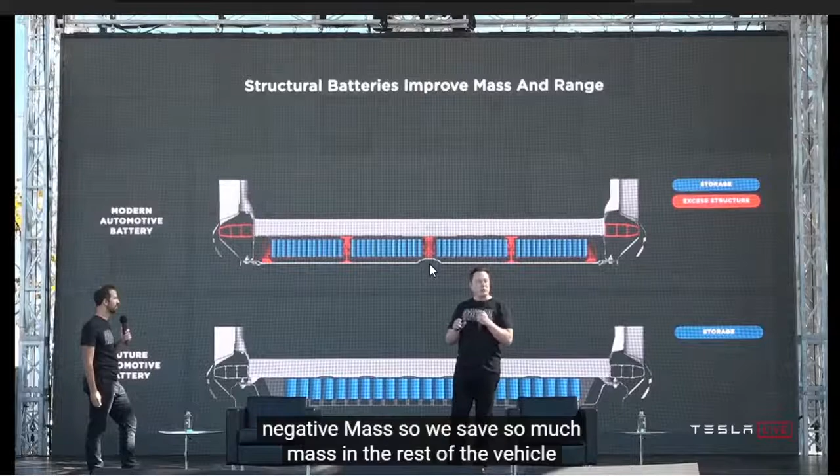So this is really quite profound. Effectively, the non-cell portion of the battery has negative mass. We save more mass in the rest of the vehicle than the non-cell portion of the battery. So how do you really minimize the mass of a battery? Make it negative. Make the non-cell portion of the battery pack negative.

It also allows us to pack the cells more densely because we do not have intermediate structure in the battery pack. Instead of having these supports and stabilizers and stringers and structural elements in the battery, we now have a lot more space in the battery because the pack itself is structural.

And what we do is essentially, instead of having just a filler that is a flame retardant, which is currently what is in the 3 and Y battery packs, we have a filler that is a structural adhesive as well as flame retardant. So it effectively glues the cells to the top and bottom sheet, and this allows you to do shear transfer between the upper and lower sheet. Just like if you have a Formula One car or a racing boat, with carbon fiber face sheets

and, say, aluminum honeycomb between them, this gives you incredible stiffness. It's really the way that any super fast thing works, you create basically a honeycomb sandwich with two face sheets. This is actually even better than what aircraft do, because aircraft can't do this, because fuel is liquid.

In our case, the batteries are solid, so we can actually use the steel shell case of the battery to transfer shear from the upper and lower face sheet, which makes for an incredibly stiff structure, even stiffer than a regular car. In fact, if this was in a convertible that had no upper structure, that convertible would be stiffer than a regular car.

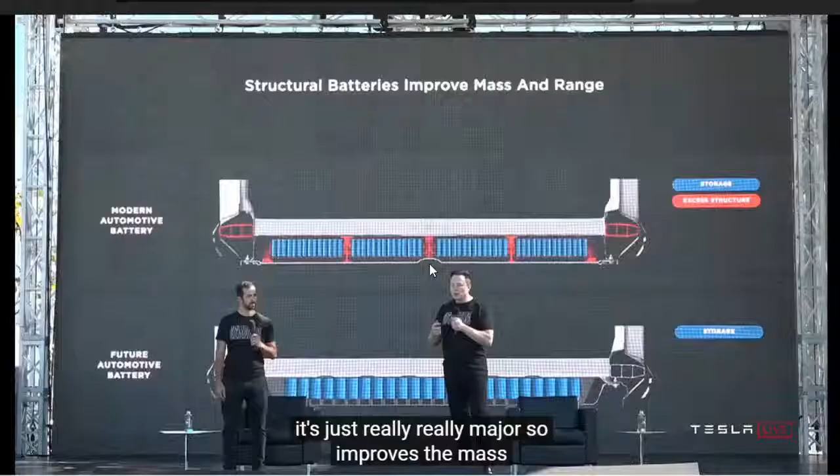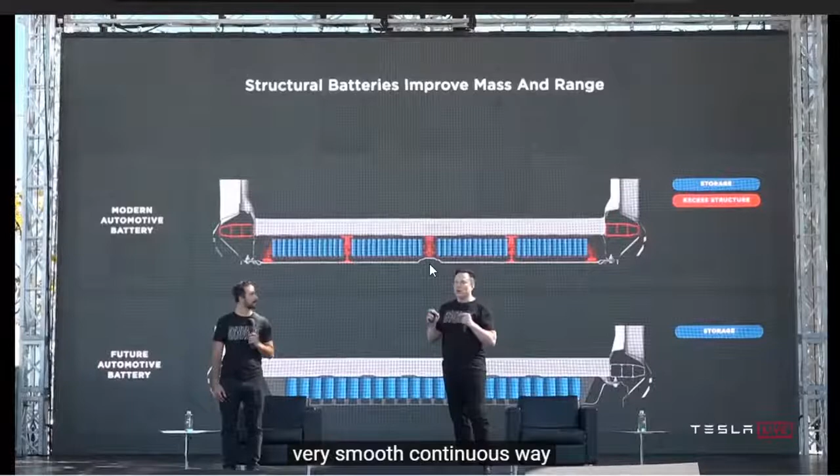So this is just really, really major. It improves the mass efficiency of the battery, and then those castings are also quite important because you want to transfer load into the structural battery pack in a very smooth, continuous way, so you don't put arbitrary point loads into the battery. You want to sort of feather the load out from the front and rear into the structural battery.

It also allows us to move the cells closer to the center of the car, because in the top one we've got all the supports and stuff. So the volumetric efficiency of the structural pack is much better than a non-structural pack, and we actually bring the cells closer to the center, and because they're closer to the center, it reduces the probability of a side impact potentially contacting the cells, because any kind of side impact has to go further in order to reach the cells.

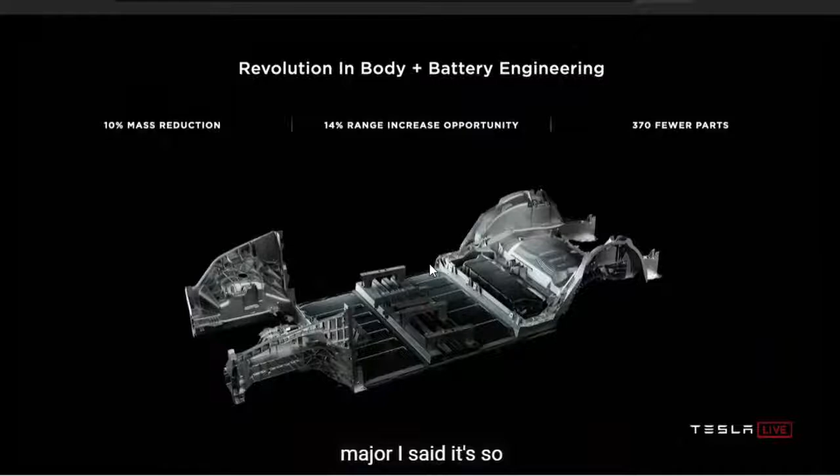It also improves what's called the polar moment of inertia, which you can think of like an ice skater, arms out or arms in. Arms in, you rotate faster. So if you can bring things closer to the center, you reduce the polar moment of inertia, and that means the car maneuvers better. It just feels better. You won't know why, but it just feels more agile. So it's really cool. This is really major. Like I said, 10% mass reduction in the body of the car, 14% range increase, 370 fewer parts.

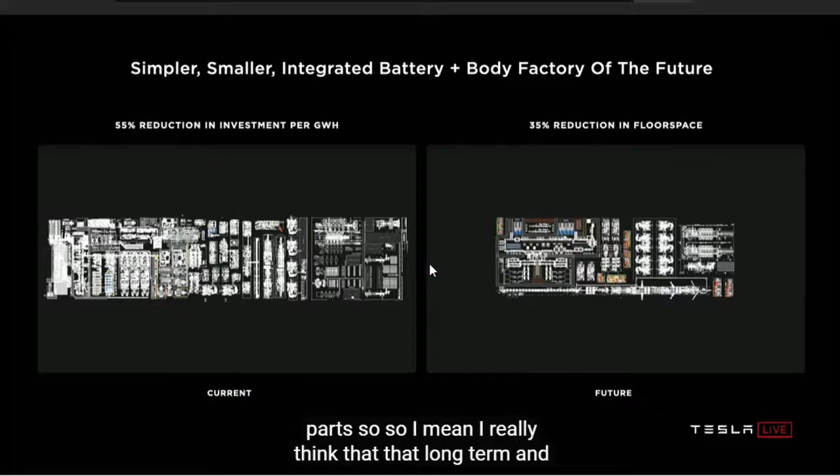I really think that long term, any cars that do not take this architecture will not be competitive. And it's not just at the product level a better product, but in the factory, it's a massive simplification. You saw the part removal. It's casting machines. It's the structural battery pack. So we're looking at over 50% reduction in investment per gigawatt hour, 35% reduction in floor space, and we'll continue to improve that as we make the vehicle factory of the future.

Yeah, so it's major improvements on all fronts, from the cell all the way to the vehicle. And in addition to enabling additional range and improving the structural performance of the vehicle, it is worth another 7% dollar per kilowatt hour reduction at the battery pack level, bringing our total reductions now to 56% dollars per kilowatt hour.

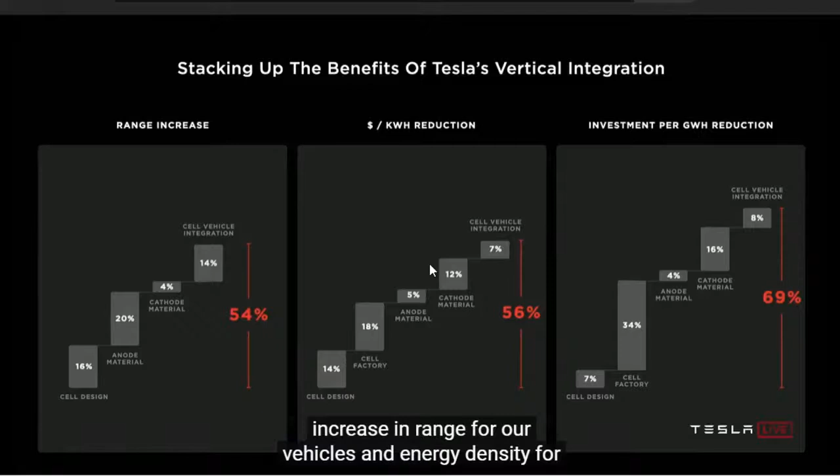All right, so stacking it up, we're not just talking about cost or range. We've got to look at all the facets. Range increase: we're unlocking up to 54% increase in range for our vehicles and energy density for our energy products. 56% reduction in dollars per kilowatt hour at the battery pack level, and a 69% reduction in investment per gigawatt hour, which is the true enabler when we talk about how we achieve this scale problem.

So I think it's pretty nice that investment per gigawatt hour reduction is 69%. I mean, who would have thought? Yeah, just happened to work out that way. Yeah. I mean, 0.420%, of course.

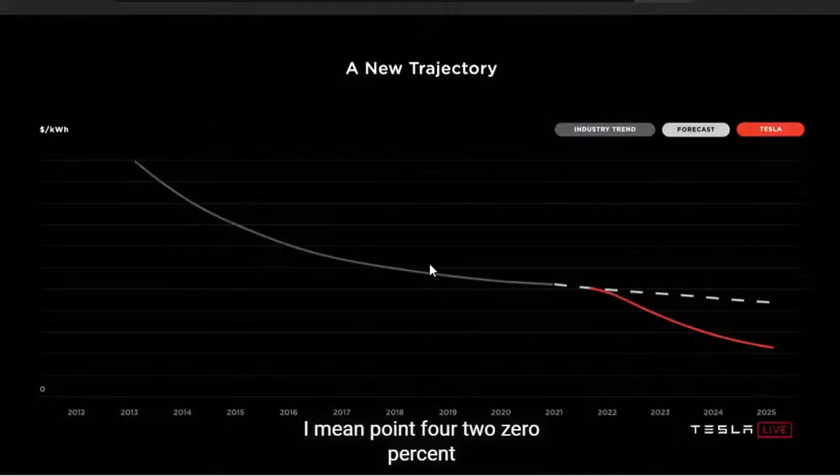So what this enables us to do is achieve a new trajectory in the reduction of cell cost. Now, to be clear, it will take us probably a year to 18 months to start realizing these advantages, and to fully realize the advantages, probably about 3 years or thereabouts. It's not like if we could do this instantly, we would. But it just really bodes well for the future, and means that the long-term scaling of Tesla and the sustainable energy products that we make will be massively increased.

So what tends to happen as companies get bigger is things tend to slow down. Actually, we're going to speed up. And we have to speed up if we're going to accelerate the transition to sustainable energy. Long term, we want to try to replace at least 1% of the total vehicle fleet on Earth, which is about 2 billion vehicles. So long term, we want to try to make about 20 million vehicles a year.

But I think it's important to point out that when we talked about 3 terawatt hours by 2030, the problem is a 20 terawatt hour problem. So everybody needs to be accelerating their efforts to accomplish these objectives. Doesn't matter where you are in the value chain, there is a ton to do. You need to rethink from first principles how you do it so that you can scale to meet all of our objectives. Yep. And Elon?